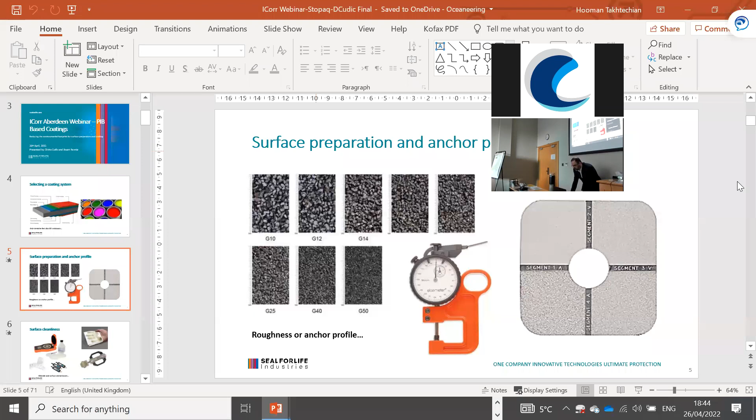Is there any issues with the sound or anything? Anybody, any comments? No, but if there was any problem, people will comment. Sound is perfect.

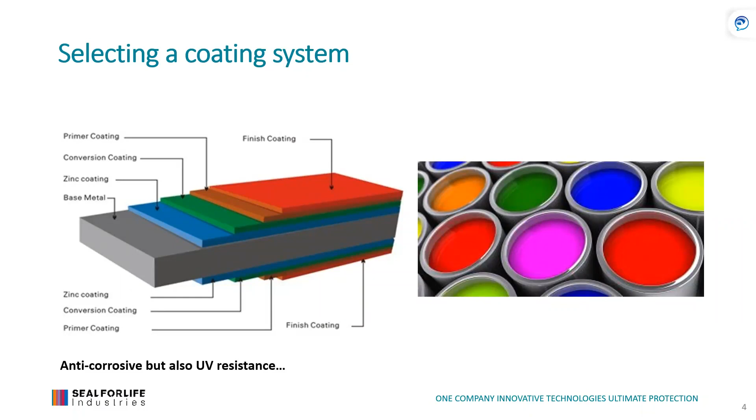But first, some basics, because this is ICorr. How do we protect against corrosion? How do we prevent corrosion? Mainly it starts with selection of the right coating systems that guide us to the surface preparation requirements.

Now, when I started a long time ago, I started as a contractor in rehabilitation of crude oil storage tanks. It was something none of the older engineers wanted to do, so me being the youngest got that job, the dirty one. And 60% of that job was actually to blast and paint the whole tank. That's how I got involved.

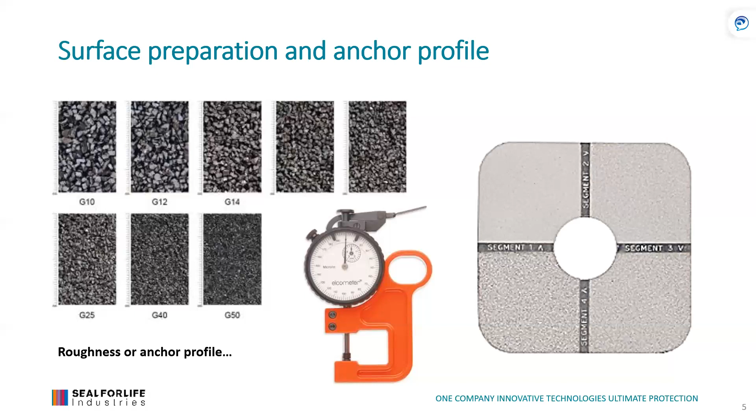And that's when you learn what we're doing: we're creating a roughness for the coating because of mechanical adhesion. Cleanliness comes along the way, but little by little you learn different coatings, different viscosities. How will they flow into the pores of the steel? How will that react over time? Are they drying too quickly, too slowly?

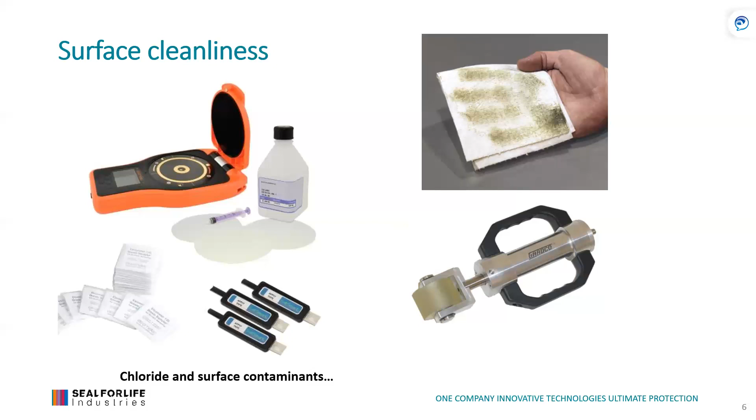Complicated world. Once you do surface preparation, create a profile, of course we need cleanliness - the cleaner, the better. It was always about what kind of air are we using to clean the surface, does it have any contaminants, and so on. But we have various ways of checking that.

Then we get into the coating. What is the dew point? What are the temperatures of the steel? Shouldn't be too low, shouldn't be too high. We don't want accelerated curing of the coatings. And then, of course, we have to look at wind speeds, especially when you do tank rehabilitation.

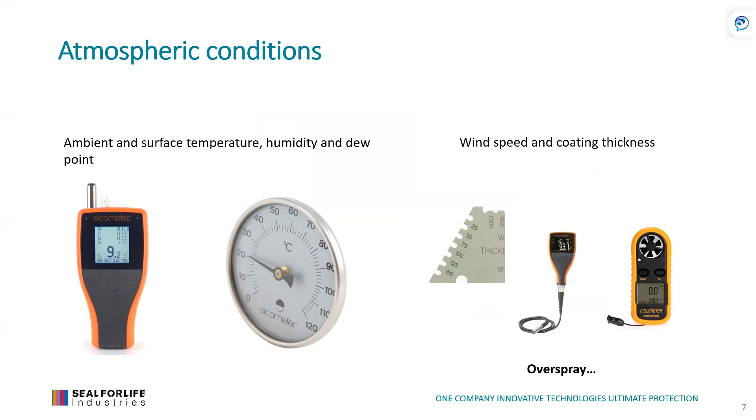There's a lot of overspray and a lot of painted cars that get you into trouble. I learned that one - spent a day at the police.

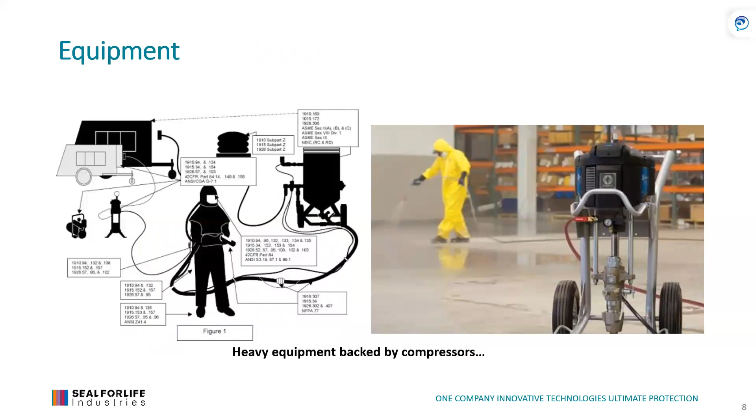Of course, all that application, surface preparation, and application of coatings comes with equipment - sandblasting equipment, painting equipment, powered by compressors, which we'll get to also later, the effects of those. And this is what it looks like - crude oil storage tanks, nice clean surfaces are always easier to do than angular areas, which bounce all over the place.

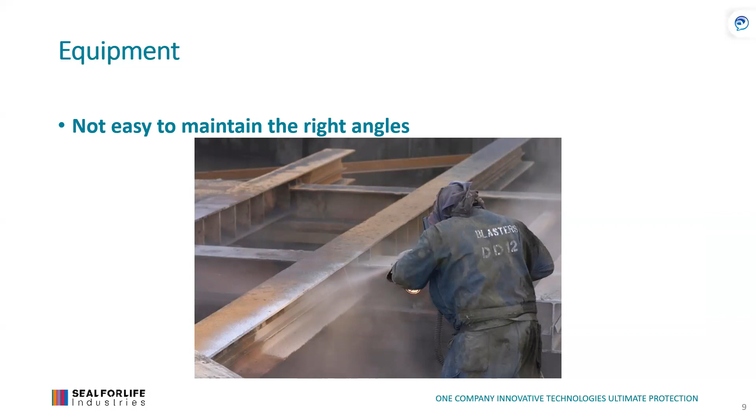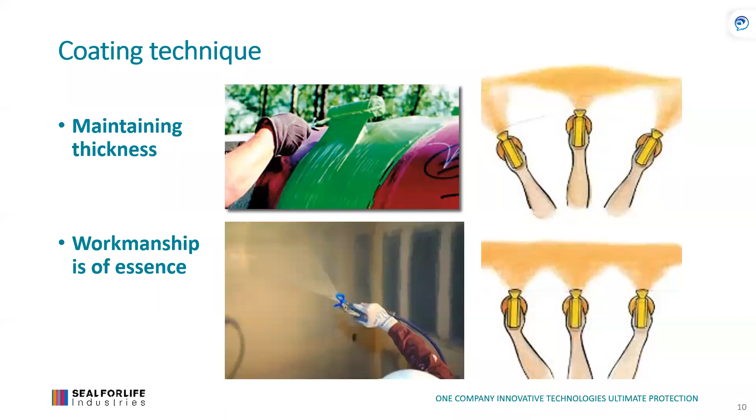And then we're also getting into the part of application. How good a job really depends on the applicator, how well he's going to hold his gun, what is the angle, what is the distance, is the coating going to flow into the pores of the steel, is the coating going to fuse together, or are you going to get that nice film, and at what thickness? It's very important, because if you don't get it right, it will define the lifetime of the coating.

During that period, of course, safety. Nowadays we take care of people a lot more than we used to in the Western world. Unfortunately, 80% of the rest of the world still use T-shirts as filters over their heads during blasting and painting operations. So it's still common to see blasting and painting out in the open.

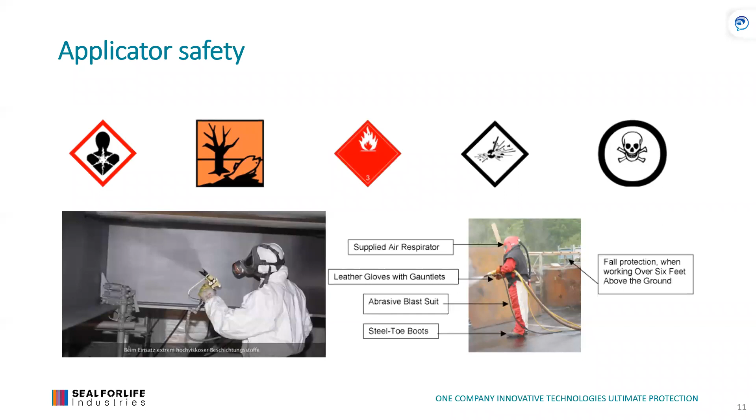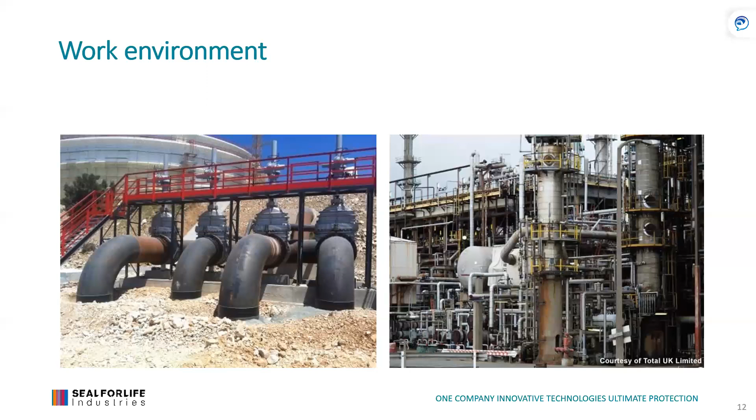And then, of course, it makes a huge difference what kind of work environment you're working in. Are you in an environment where you can actually control where your blast media goes, and paint, etc.? Or are you in a module where you have a lot of sensitive equipment as well, pumps, etc.? Is the grit going to get into the pumps, into the vital areas, and cause sometimes even more damage?

So these are all the things which are part of the process of actually getting a coating onto the surface. And then how do we know, did we do a good job? How do we know how long will it last? Well, in most cases, time will tell. And sometimes it shows up within a few weeks, and hopefully it's not going to show up in the next 15 to 25 years. It purely depends on a lot of circumstances.

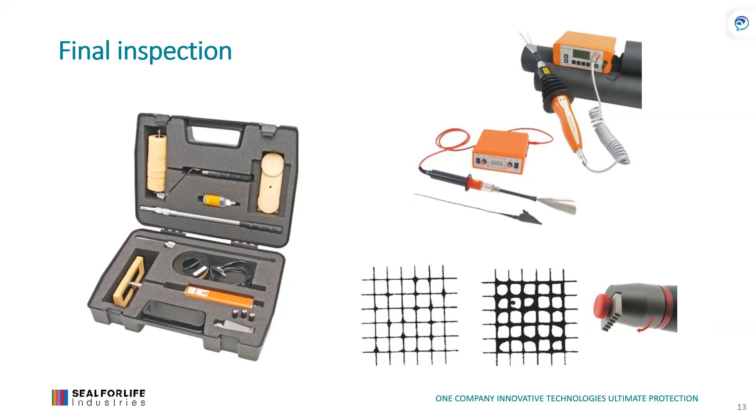But we do some destructive tests, pinhole detectors, to find out how does it work. The effects of blasting - well, not to get into the details of the hazards of safety and so on, but...

nowadays we're more looking at, okay, let's choose my favorite grit of choice, like most people would choose garnet because it's the cleanest. But then you get asked questions nowadays: where's this garnet coming from? Oh, from Australia, and we made a big pit to get the garnet out, and then we transferred it across the ocean, and now you're getting warned about what are the CO2 emissions, what have you done to planet Earth to get that grit across?

And then once you do the blasting and painting, you remove some coatings, sometimes even the good coatings like red lead, etc., that we have to remove. What are we going to do with the waste? And then we brought it from one side of the world so we can dump it somewhere else.

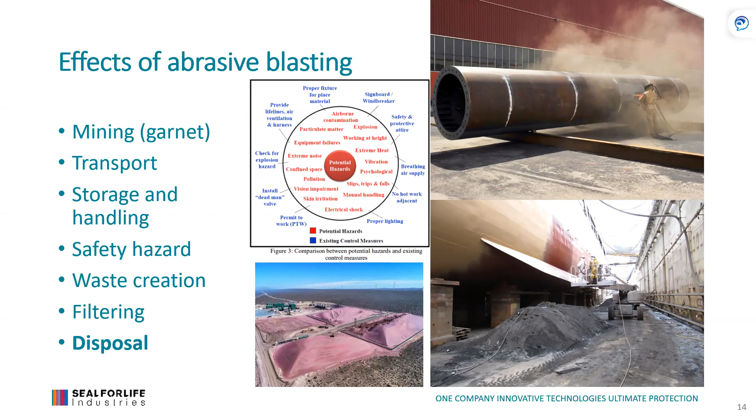A lot of these things are now getting a lot of attention. How do we dispose of it? And what do we create? Especially filtering is becoming a big issue. There's some countries in Europe that will charge you up to 700 euros per ton just to clean or purify the waste grit to get all the previous coatings out, so you can dispose of them separately, especially if they're chromate 6, red lead, etc.

And when it comes to paint, same thing. Of course, we're working on making paints safer for the people, for the environment, the VOC emissions, the heavy metals that we find in the coatings. But then again, the overspray - where is it going? It's going into nature, not necessarily onto the assets that we are trying to protect, the people, the equipment as well, etc. And then what do we do with all these contaminated buckets?

Just to clean an airless spray, you're going to use 20 to 30 liters of solvent just to clean it up. And then what do you do with that solvent? Where do you dump it? I don't even want to say where it goes.

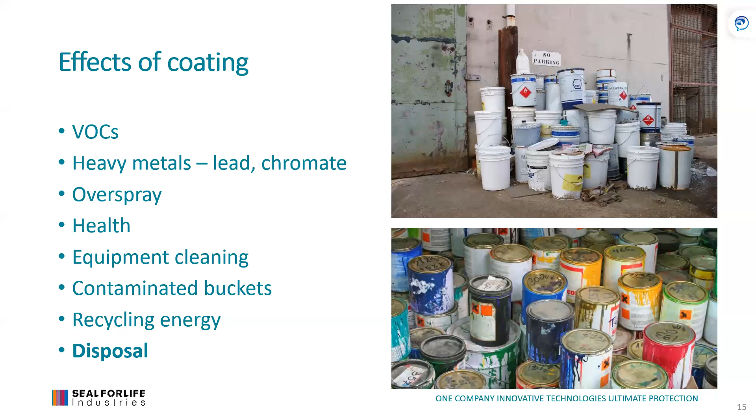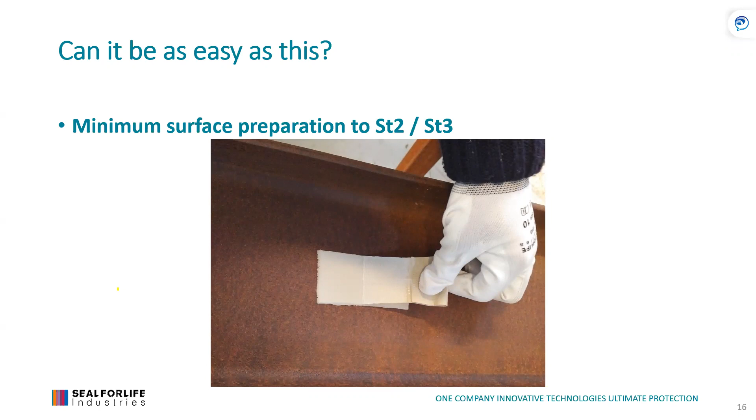Or, if we look at it, if we had a coating that is so surface tolerant it doesn't need roughness, which means it doesn't necessarily need grit blasting, etc. - could it be as easy as remove loose rust, loose paint, have immediate adhesion, and immediately it tells you will it stick or not, and if it sticks, then it'll probably stick over time. But I'll get into more details on that approach of thinking differently, because we do need different kind of results.

Now, we can try and take the existing approach - we tried with diesel engines, tried to make them more emission friendly, but nothing much happened until they decided to go for battery. And then battery actually reduced the noise levels, reduced emissions in the cities, etc.

So sometimes you just have to - we just want paint and coatings to come out of a can, and we need to apply them by brush or by rollers or by spray guns. But we can see even in the car industry nowadays that foils are becoming quite popular, and yet you have foils that are easy to apply, no VOCs coming out of them, and yet UV resistant, mechanical impact resistant, etc. So yeah, it is possible to achieve certain things, but sometimes we have to get out of the bucket, I guess, to put it that way.

So the target of, let's say, creating a new coating - and now I'm talking 90s, late 90s - create a coating that needs minimum surface preparation, which means just change the adhesion mechanism, not to have an interlocking kind of mechanism, but a dispersive kind.

No surface roughness, that's what I mean. Adhering to most surfaces, not only steel, but also coated or healthy coatings that are there. No corrosion under creep, so you don't want water to go underneath it, or corrosion when it's expanding. The rule was times 10: 1 micron is 10 microns, 10, 100, and then it pops the coatings off. No VOCs, harmless to people, to the environment, etc.

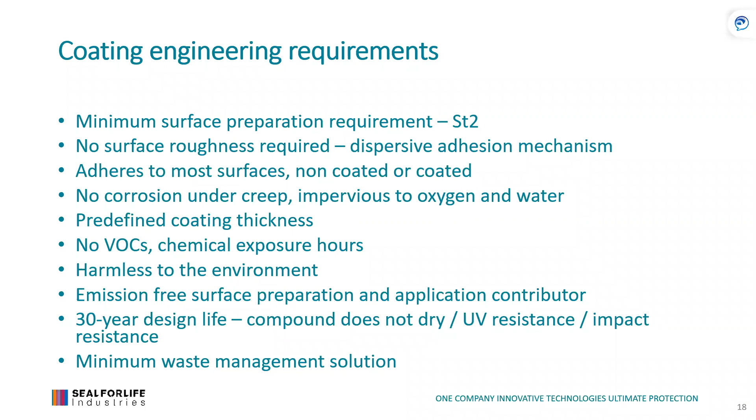And then, to have a lifetime, because it's good for business. I used to be a contractor when you have to do maintenance every 5 to 10 years, same item, blast, paint. But then what are we doing? Creating more waste and polluting the environment in return.

So where can we find inspiration? Chewing gum, we thought, is a good inspiration. You throw it onto the street, no surface preparation, none of that, and you have immediate adhesion, and it will withstand foot traffic, UV resistance, the cold temperatures, the hot temperatures. Most countries even banned it, like Singapore, because it's such a nuisance. So there's something in it.

It works, and at the same time it delivers health, safety, and all the other aspects. It was an edible product. But of course, just by thinking about it differently, you can already achieve something which offers safety for the people, for the environment, and of course an economic aspect, because we know that a piece of chewing gum on the road will outlast the coated part of the road.

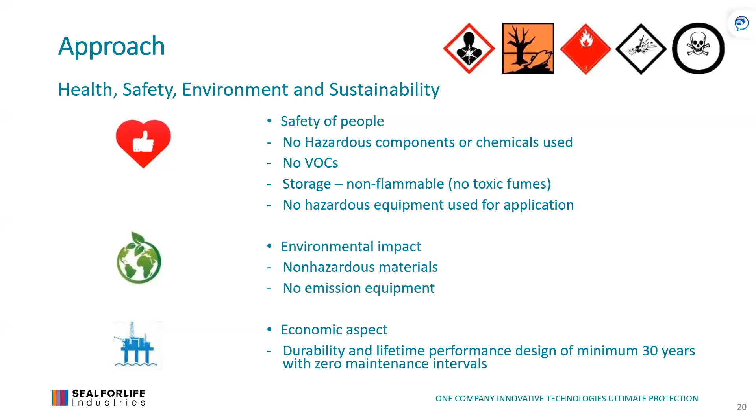So how did we do it? Our approach back then was to select as many polymers as possible that are available in the market, with a track record, primarily what stops corrosion -- eliminate oxygen, and you eliminate oxidation really.

So select a polymer that doesn't allow oxygen and water to go through it, to have immediate adhesion of a dispersive kind, without roughness, etc., something that never cures, because a coating that never cures will always have that adhesion and the flow. The same reason why we don't apply dry paint, we apply wet paint.

But then again, you have also a polymer which is used in the food industry, for example. It's actually used in chewing gum. It's also used as a sealant on double glazed windows that are filled with hexafluorides or even lighter gases like argon, not to escape and oxygen not to go in. So food industry approval, etc. The polymer is there.

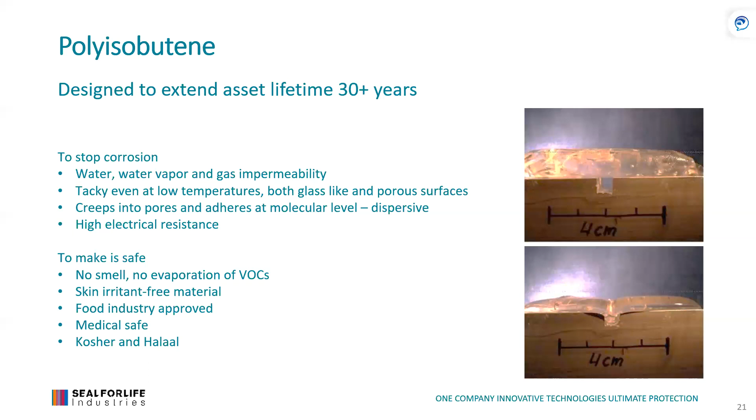Track record -- that's what you need when you develop a new product. You need at least a track record of the polymers that you use. BASF invented the product in the 1930s for other reasons in those times, but at the same time it was proven that the product, because it has been filtered so many times, removal of free radicals, it actually came to a point where you didn't have to do much to it, and you had lifetime out of it.

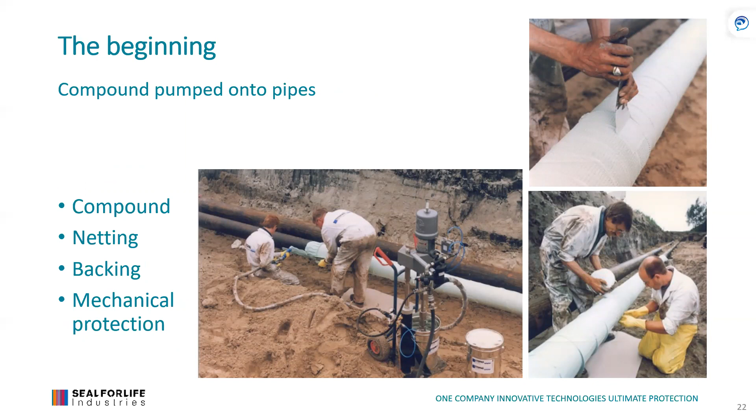So in the beginning, make the product, make the compound, pump it onto the pipe, then put a netting to hold it all together, and put mechanical protection. Labor intensive, you don't have even thickness.

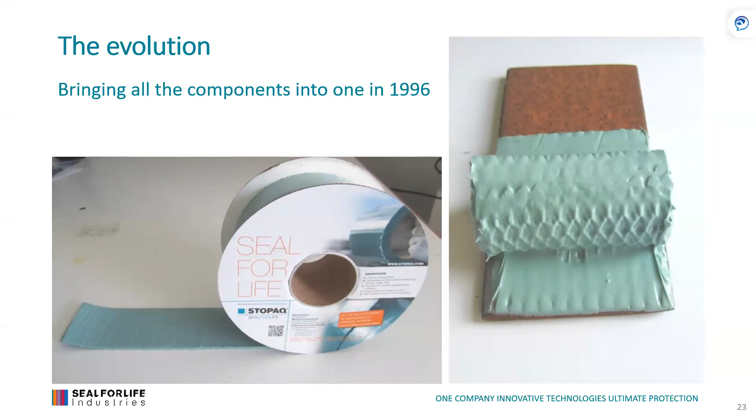So we thought, okay, let's just put it all into one foil, if we can call it that, where we have the compound, we have the netting which holds everything together, and we have a backing. And then we add mechanical protection on top of it. That bringing us to different kinds of systems for pipework, structural steel, and then available pastes and putties for uneven surfaces, etc. I'll show you some examples.

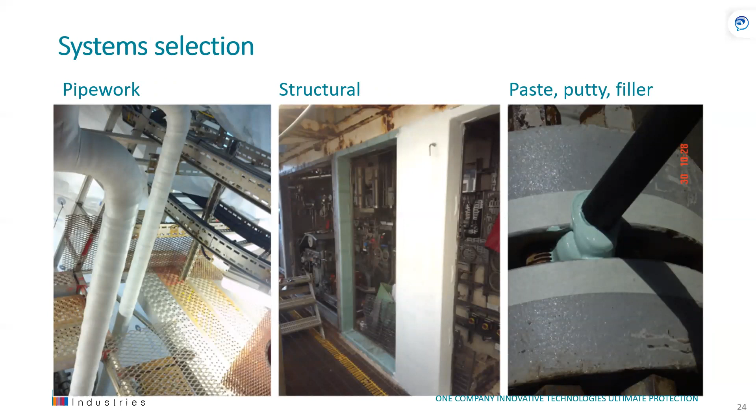And the evolution, of course, from having a solution to start underground -- we started with manhole covers, and then went onto pipes, and then we started developing atmospheric systems, etc., growing out of it.

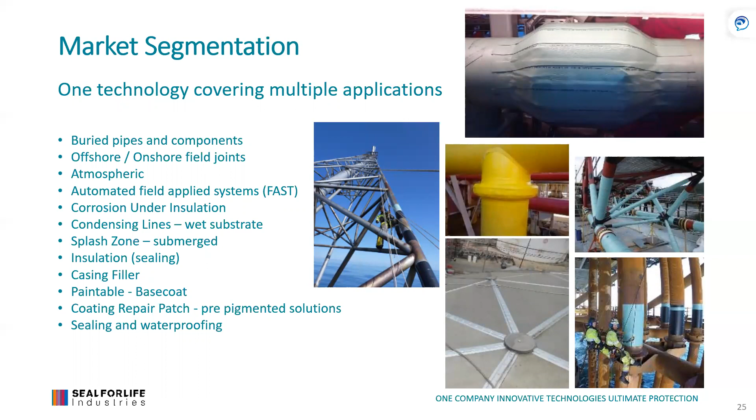Now, what are the differences? Of course, these differences are mainly requirements of standards. Standards are minimum performance criteria according to the environment you're in. So, for example, 21809-3 discusses performances of buried and submerged pipes, soil stresses, how the system works with cathodic protection, etc. If we go atmospheric, of course, cathodic protection is not an issue anymore. We have UV resistance and other parts that we need to conform to.

Corrosion under insulation has its own set of standards. Wet substrate, splash zone, again, another set of standards, because you have to apply it on a wet surface, with a high chloride content in salty areas and salty environments, and yet withstand lifetime, but also impact resistance from whatever floats in the sea, trees, branches, but also boats that impact the piles, etc. Insulation and cladding, which is part of the sealing, so you can actually seal off the cladding for extra lifetime to eliminate the water ever getting into insulation.

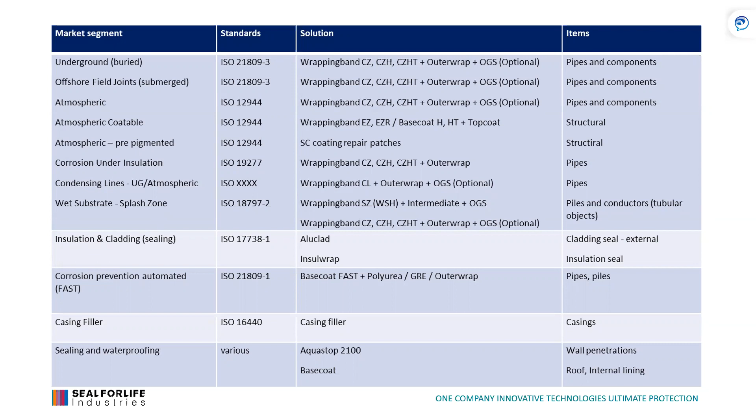Corrosion prevention, which is automated, so you can do longer stretches of pipeline, casing filler, and then of course sealing and waterproofing. Now that one is a tough one. There's no real standards, sometimes it's not even national, it's even regional, and it's also whether it's a public building or home building, that's a difficult one.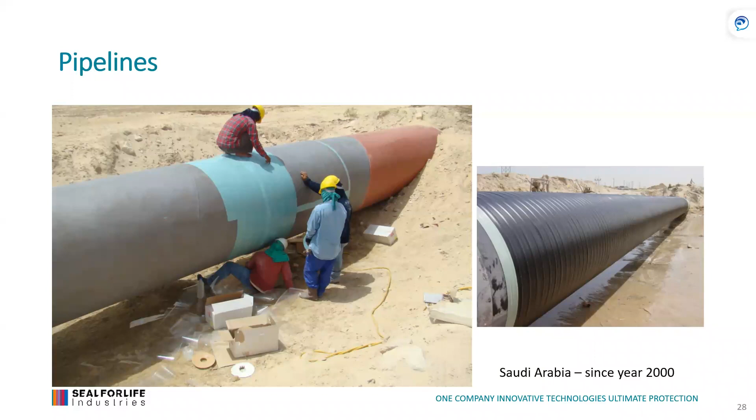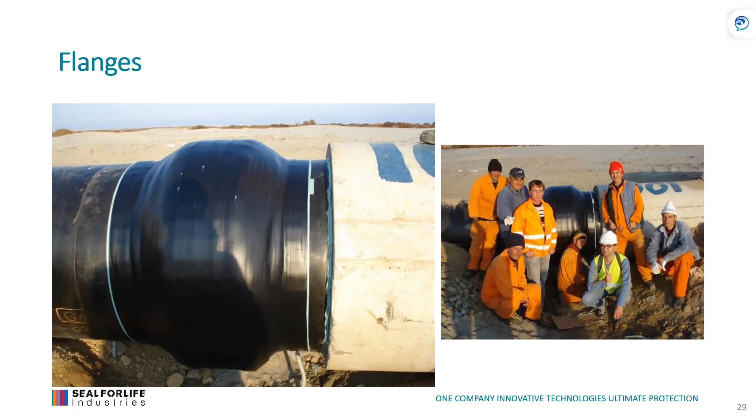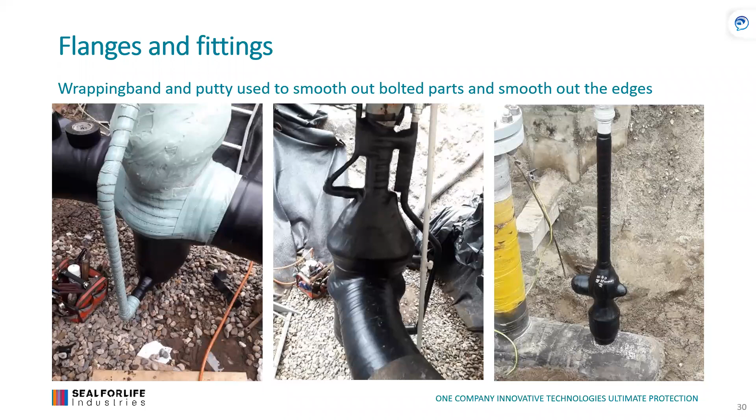And then we did the pipes. What about the flanges? So work with the putties or the paste to do that part. A lot of different flanges and components sticking out of the pipe. That's where you work with the wrapping bands for flatter areas and circumferential areas. But when it becomes a little more difficult, then you can use the putties or the paste to smooth out the edges and encapsulate everything.

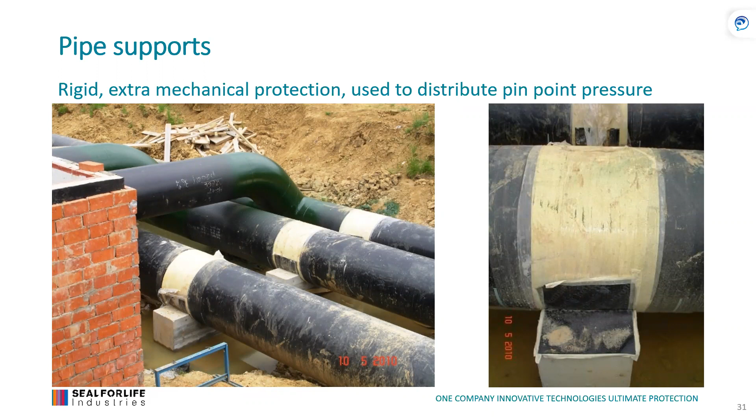Soft product. Yes, it remains soft, but it can be as hard as we need it to be. So we always have this minimum system of this non-curing coating, with mechanical protection that can withstand impact from soil, backfilling, etc., or scaffolding. Somebody chips into the system, which will even get to self-healing. But if we have a large pipe with large weight, then we can add extra mechanical protection or weight distribution, so we don't have pinpoint pressure. It's all a matter of doing systems.

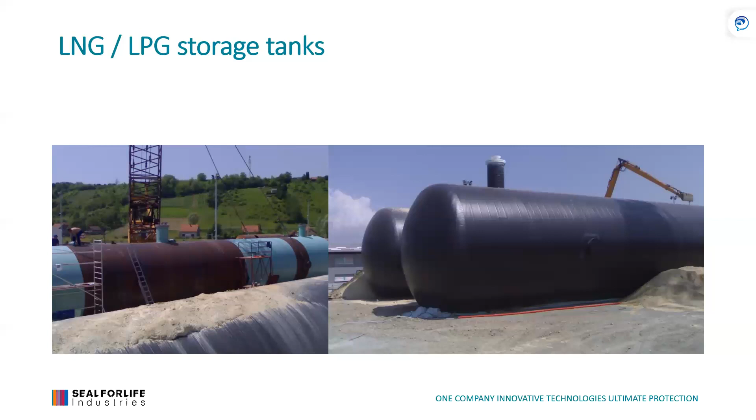Offshore field joints, even LNG or LPG storage tanks, high expansion and contraction, plus temperature changes and fluctuations. And again, if you have a coating that is almost like a skin, whether you gain weight or you lose weight, it's always with you. That's the effect that we're looking for.

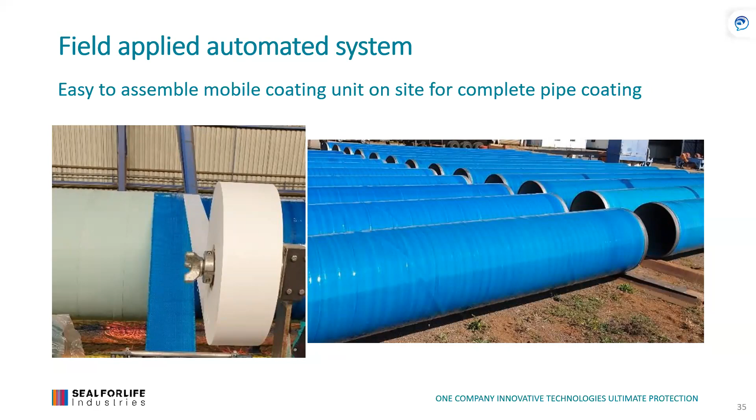And then these are the field applied automated systems for longer stretches of pipes. Doing a lot of these things underground, we thought, well, there's a lot of pipes above the ground. Why don't we start going above the ground? And I think one of the biggest projects we've ever worked on is in Scotland, Mossmorran, the Shell plant, where I think we did about 8 kilometers of pipe work out there, going from underground to above ground. That was about 15, 16 years ago.

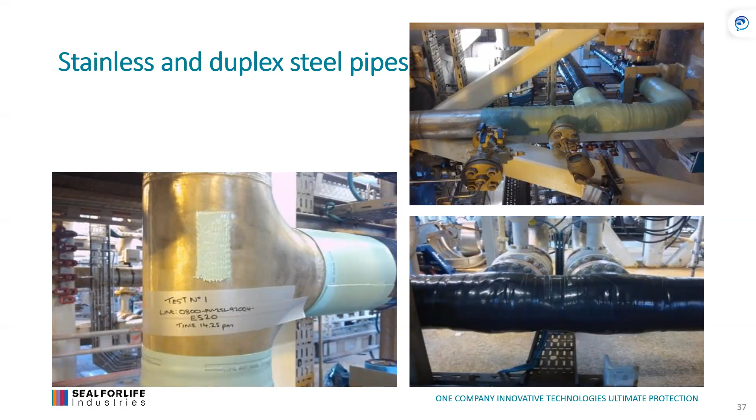But then above the ground, you also get into the stainless steels, you get into different metals as well. Stainless steel has its passivation layer, which you don't really want to remove. You don't want to roughen it up, so you can put a top coat on it. And yet we know about the pitting corrosion of stainless steel pipes. So even without any special surface preparation, you have immediate adhesion to the surface. And like I mentioned earlier, you always take a patch of the product and test whether it sticks or not.

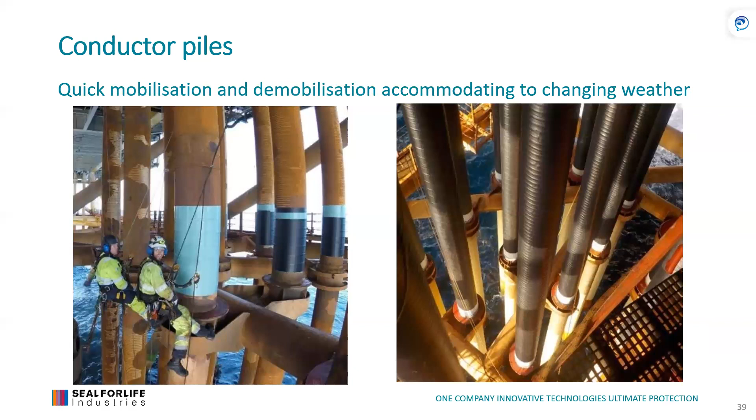So a lot of the jobs can be done just because of ease of application, just by rope access, mobilizing and demobilizing quickly. We're still learning about the product, so what other effects do we bring in? And we get surprised. A lot of these effects we talk about, we didn't design it for all of that. Self-healing happened, we were happy. Sound dampening happened, so we're happy. There's still a lot of things we're finding out 20 years down the line, what else it can do.

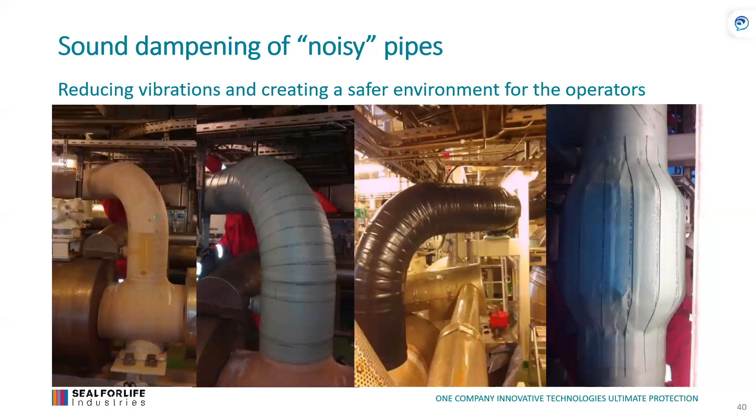And this was just a very noisy area. We wrapped the pipes. Actually, we got this job because the surface temperature of the pipework was 95 degrees Celsius, and they needed a coating that can be applied at that temperature. And then once we covered it, it turned out that it reduced the noise levels in the area.

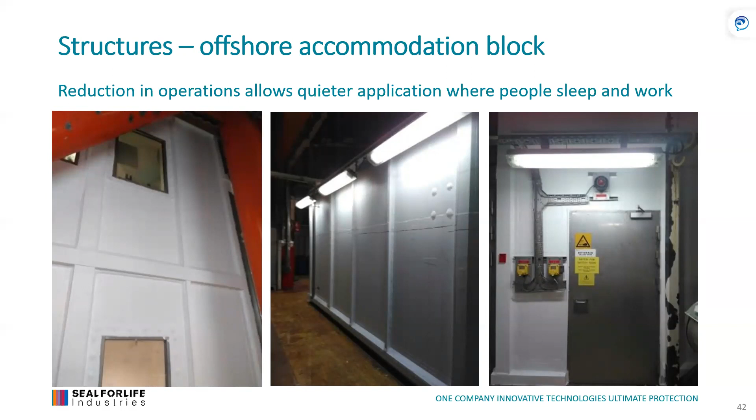And then again, easy surface preparation and application allows you to go to very distant areas. And how large can these areas be? I mentioned the part with structural steel and flat areas. The whole idea was, why can't coatings be applied like wallpaper? So you can have rolls of 300 millimeters wide, prepare the surface, remove loose rust and loose paint, and apply them in sheets one next to another, put a top coat on it, and that's more than enough to do it.

Flanges, all kinds of different parts for corrosion and the insulation of course. The underneath part, we have the standard system of wrapping band plus an outer wrap. Insulation, once the cladding goes on top.

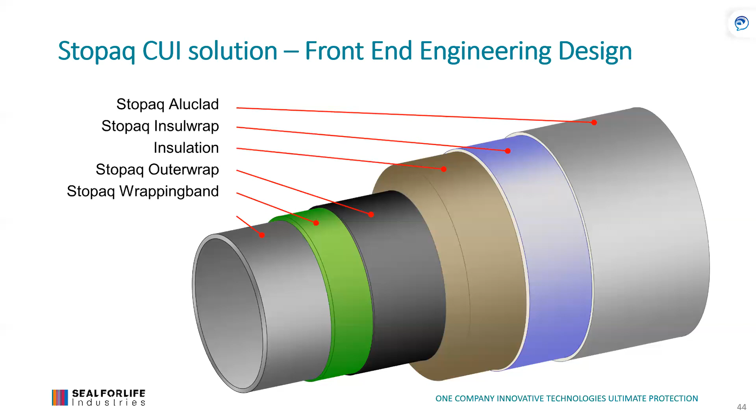On top of insulation, we also have sealing materials like Insulwrap that can, even if something happens to the cladding and the water goes through, keep the insulation sealed off, because once the insulation gets wet, you lose all its insulative properties, including heat tracing.

Here's another example of a high temperature application: a pipe at 120 degrees Celsius, next shutdown is 2 years away, but it's still corroding because of fluctuating temperatures. We don't sell this product for its thermal insulative properties, but it so happened that with the full system, surface temperature dropped by 20 degrees, from 120 to 100 degrees, which for this client meant they didn't need to install personal protection on top of it.

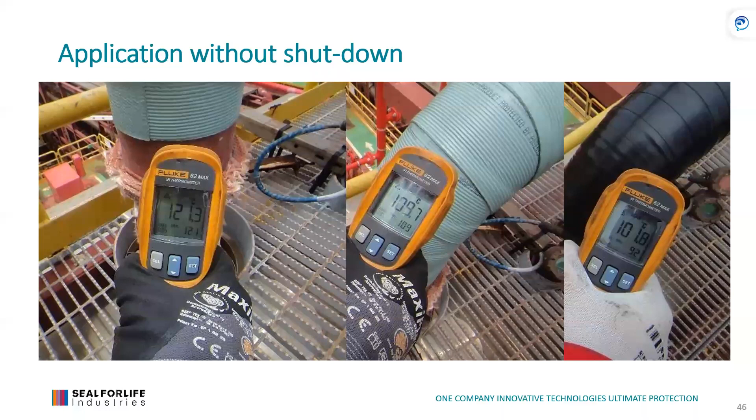And then above the insulation, there's sealing of the cladding, cladded areas, etc. From there you saw these pictures, mostly from the water industry and oil and gas industry, but we wanted to also offer these solutions for bridges, infrastructure, etc.

And then we somehow ended up in the wind industry, because we saw there's a lot of need for coating repair. These are very heavy items that get handled from one place to another, and paint chips. How do you fix it, and how do you fix it when you're hanging off ropes in the middle of the sea? That was a challenge for us, how to develop a solution.

So we have these so-called EasyQote patches, which is a one-coat system. They already come pre-colored, light gray or yellow, for the top or bottom part.

So this is an example: they come on cardboard, and with a Stanley knife you can cut out the size of the patch you need. You wire brush it, patch it, and that's how you do your coating repair.

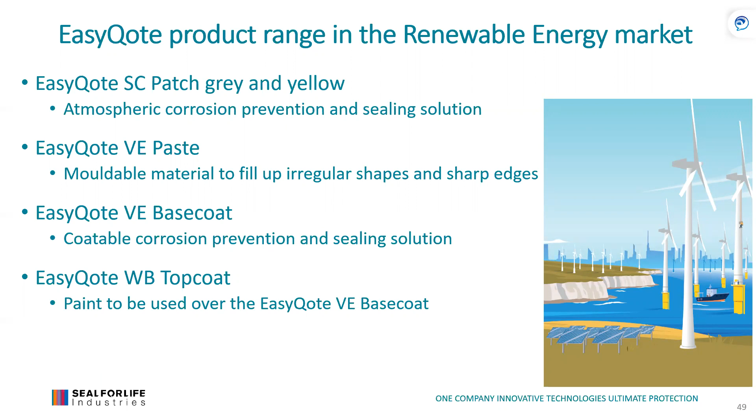And then we have other systems for irregular shapes, again a paste, a combination of different materials. I'll show you, little by little, how you get taken from one area to the other.

You start with monopiles, you end up on the towers. From towers, you end up in the nacelle and so on.

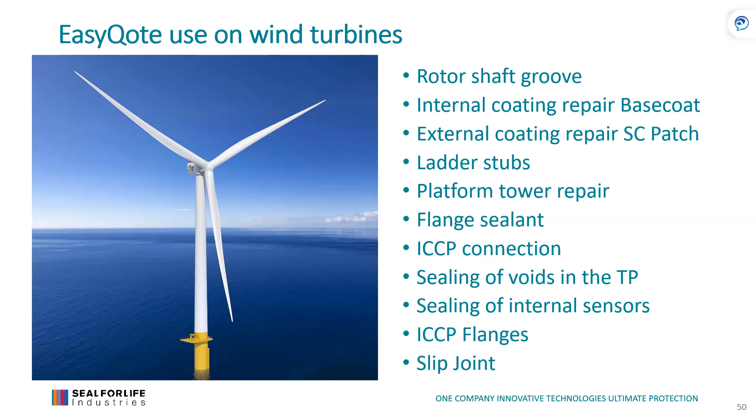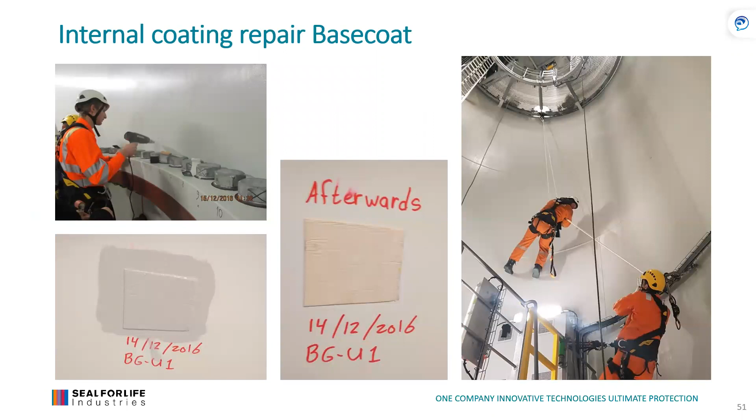This is internal repairs, and you'll find a lot of these damages around the bolted areas, where heavy equipment is used to tension the bolts. Now it's very easy to just patch it to stop further corrosion.

Sealing and encapsulating of sensors throughout the whole towers, including the wiring.

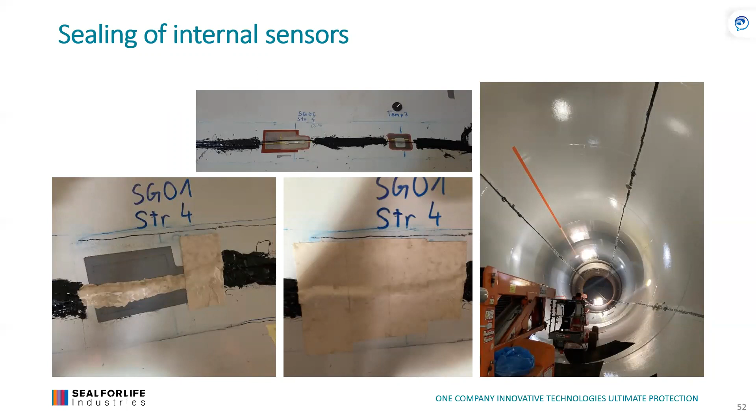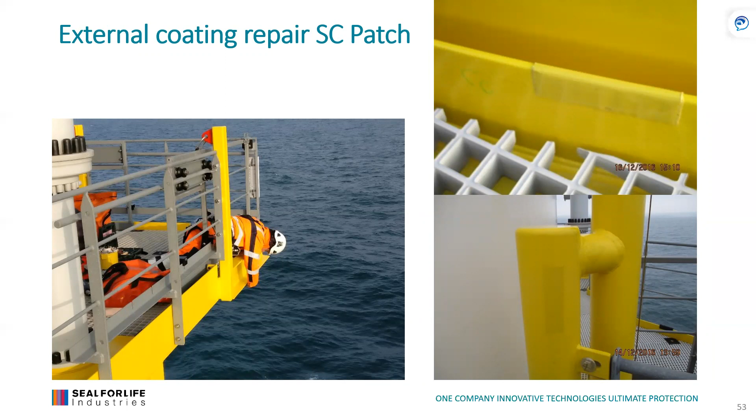These are examples of paint chips. Wherever damage occurs due to handling, you just patch it, really. So not much to do - you don't need to do surface preparation, primer, second coat, third coat, and so on. Just patch it and it's done.

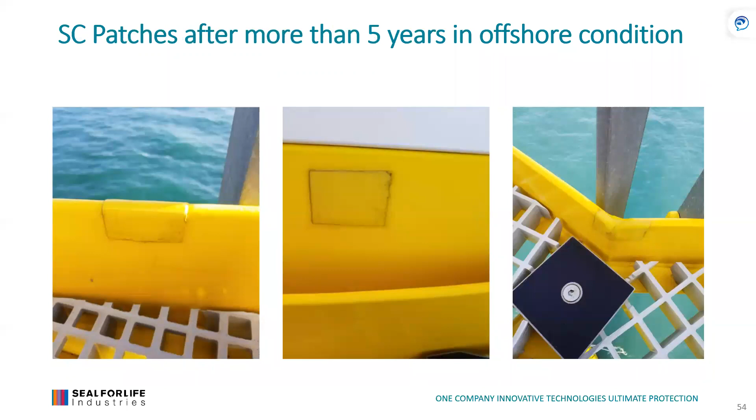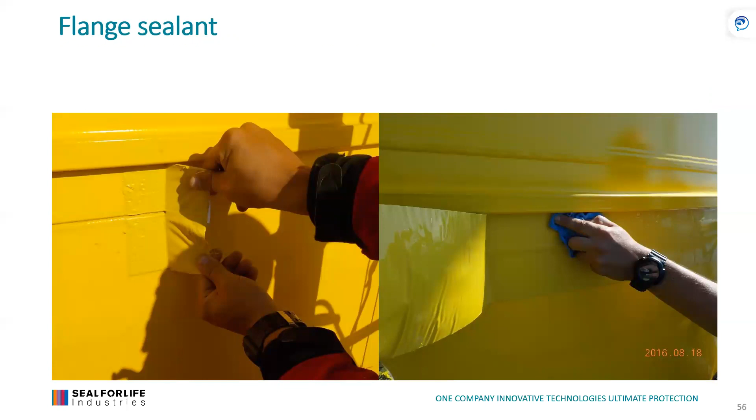Again, part of the TP, so you have a void, and obviously we know that's bound to cause corrosion in that area. So with a combination of paste to seal off the edge, and then the patch just over it in the matching color, it's a two-step system, very easy to do.

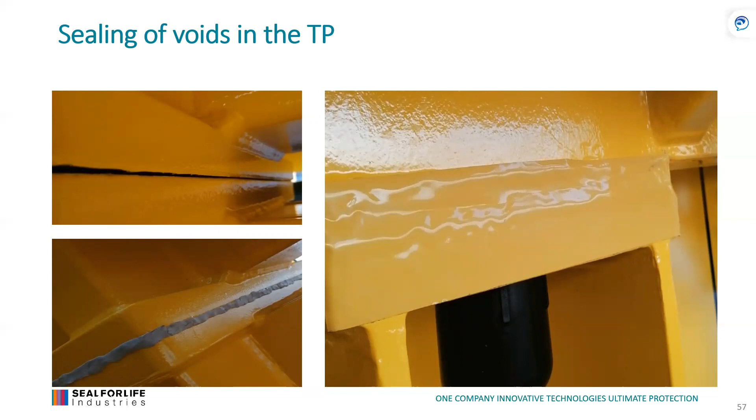And training can be online, and within a few hours you're a perfect applicator. ICCP flanges, so all different components.

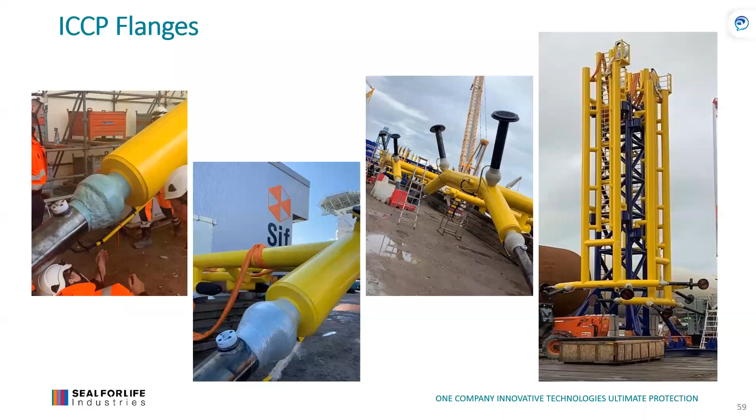This was one of the bigger projects, for this special design of windmills - slip joint windmills - where instead of bolting them together, you put the monopile in and then slip the tower on top of it. To seal those areas from water going underneath and creating corrosion, we create these seals, the green one you can see. Then when you slip the tower on, it smears out the product and seals it off from the environment.

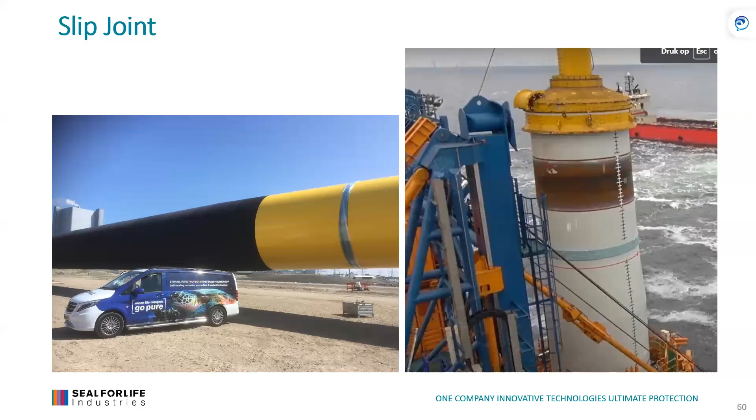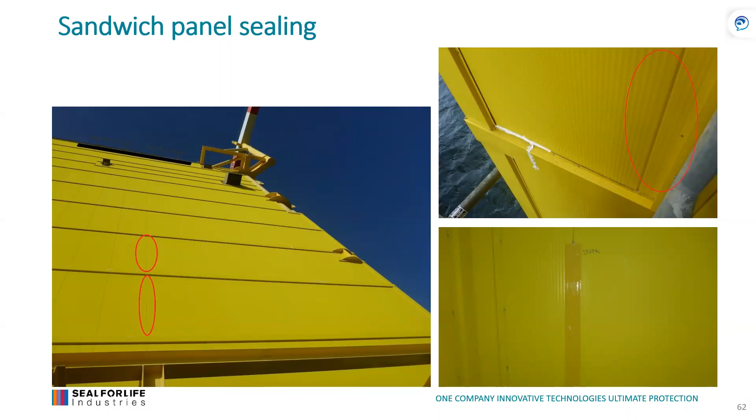One of the latest projects we've been working on was sealing on substations. They're all made of sandwich panels, and of course these locations are always very windy, and that wind, just by hitting these structures, makes the sandwich panels become loose. Soon enough, the rain, the water, the wind, the salty air gets in between the voids. So we've been sealing off those areas as well to prevent further access.

And then, of course, that came from this as well, which is the new design of towers. Well, it's not new, it's a few years old, but now being adapted, and it's very similar to the tower design of the windmills.

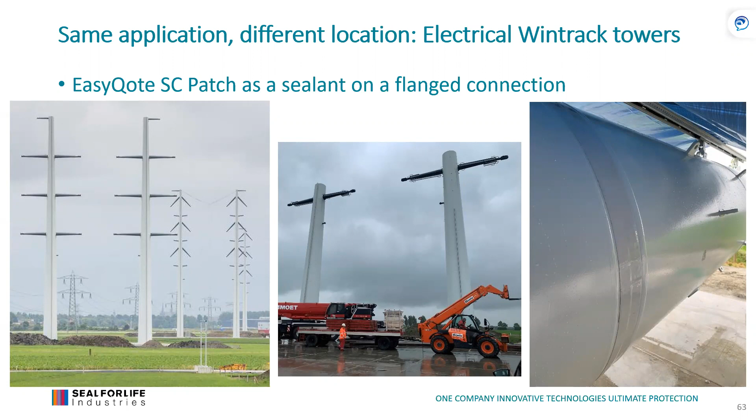So, same kind of design, they are now working on this with internal flanges for high voltage power line transmissions. So that was the easy part of the business.

And now back to what I started in the beginning, which was, okay, corrosion, yes, it stops corrosion, very good. We've been doing it for 20 years, so I think we've proven that the system actually works. But what else do we bring in? That's what we try to focus on.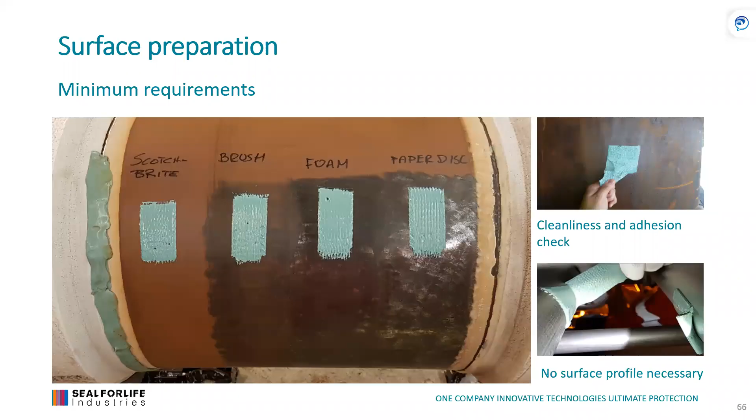This is what a Stopaq looks like. We pack it in roll form, so it looks like a tape. It has nothing to do with tape though, because you pre-cut sheets and put them one next to another, or you can roll them out like wallpaper for straight sections. Mostly you just need a pair of scissors to cut it to shape. What you do is remove the release foil, then you get to the adhesive side, and you just lay it on.

So what is the cost for all this? We always get asked this question, how much for all these effects? Of course, quality doesn't come cheap, that's for sure.

So this is a comparison we've been working on with different contractors, but also end users, of what is the cost of paint. I'll actually, two slides later, show you an absolute price comparison in numbers, in euros, not pounds. But we have to look at the whole big picture, because if we want the paint to work, we select the best paint, and we went through that process. We select the best paint. The success of that coating, 80% depends on surface preparation and application. That's also the risk - if something goes wrong in that 80%, there goes your coating, even if you went for the best one in the world.

And I've seen the best coatings fail, and I've seen mediocre paints work because somebody actually spent time to apply them properly. But in general, we have to look at all this - what is the cost of all these things, but also what is the cost over time? What is the lifetime of this? Is it 5 years, 10 years, 30 years?

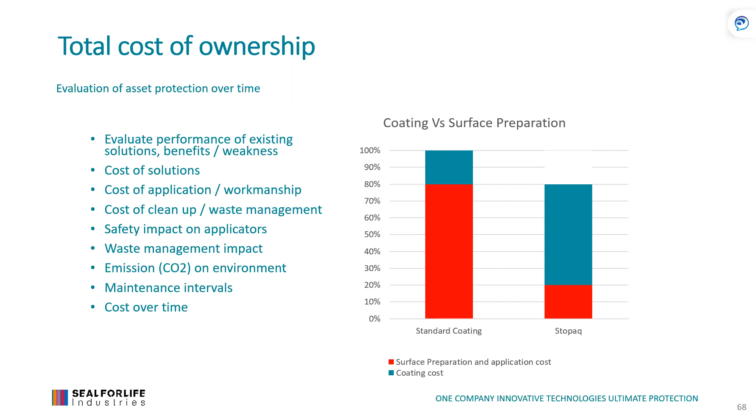It makes a huge difference, especially on the impact onto the environment. This is something we worked on with some of our clients in the North Sea, especially where the rules and regulations of waste management are getting more and more stringent. You can't go to an offshore platform now with 2 tons of grit and come back with 0 tons of grit - you actually have to bring it back and prove that you didn't chuck it into the sea.

So they looked at these comparisons - what do we get with that minimum surface preparation versus the full surface preparation that certain older systems need? This was a comparison of blasting and painting, just in grit. To do 100 square meters, you're going to need about 2 tons of grit, plus all the other stuff that goes with it.

Meanwhile, with Stopaq, no paint cans, nothing around. What you actually have is cardboard, which holds it together, and the release foil, both recyclable, easy to dispose of. And it's just 15 kilos. So there was already the big difference.

But then it was, what about carbon emissions? Because if you don't have to blast, then you don't need compressors or other things. So you can reduce carbon emissions up to 90% in this study.

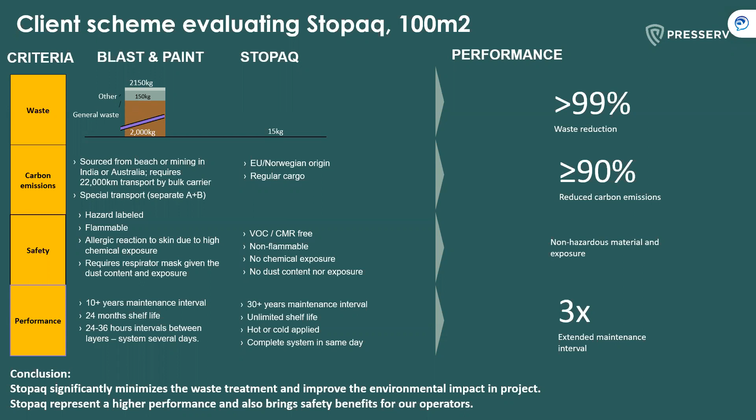If you get 30 years, you gain a lot more out of it, because otherwise you have to do it 3 times. It depends on the location - if you're close to the sea, if it's an offshore platform, or if it's inland, this maintenance interval can be anywhere from 2 to 5 years.

5 to 10 years, depends where you are, but still it's a big cost. When it comes to actual cost, there are a lot of systems that stop corrosion. You can stop corrosion with WD-40, with some grease, but then we get high tech, we get into coatings, zinc phosphates, butyl rubbers - all these systems stop corrosion. The whole difference is what does it take to apply it and how long will it last? That's the key thing. So this was a comparison with North Sea approved systems.

An epoxy system, some of the best, is between 8 and 10 euros per square meter - so primer, second coat, and third coat - versus here with this system. Of course, Stopaq has multiple systems depending where you apply it and what the application is, what resistance you're looking for. This is versus 100 euro per square meter. So 10 times the difference in cost of material.

But what does it take to apply one? What does it take to apply the other? Blasting, no blasting, minimum surface preparation speed, etc. Because, related to that, you can apply it at high temperatures, so you don't need to wait for shutdowns and so on. There's no evaporation or curing process, which means 85% humidity is not so much of an issue. So when you take all these operations into account, on an 8 euro system, you spend 200,000 euros on actually applying it.

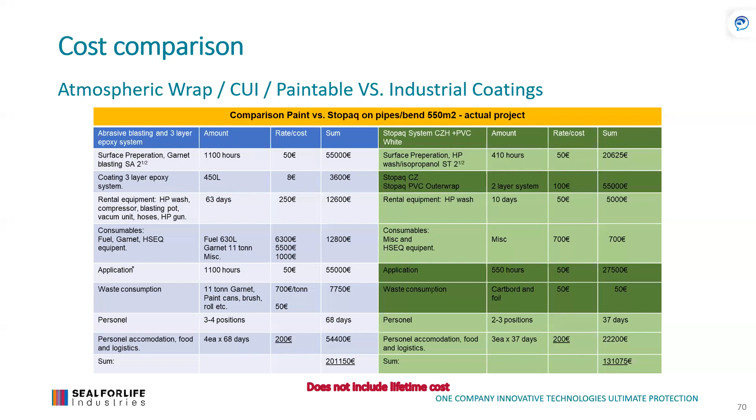So yeah, that's the story of Stopaq roughly. Along the way, of course, what are we doing? We need to show people that there are different ways of stopping corrosion, different approaches. And yes, it's always been done that way.

I've seen, especially when I was a contractor and then working for engineering firms, the copy paste, the speed of just getting the next project - copy paste, change the name of the project, change the name of the client, everything else remains the same because we've done it like that before. So it'll probably be good for the next project and the next project. I've seen it all too many times, but nothing changes. We keep on running in circles.

The pandemic was great, I have to say, in that perspective, because I could see some of the clients actually sit down, not under pressure of new projects, and actually rethink: what are we doing? Are we doing things correctly? A lot of these calculations that you've seen actually came in the last 2-3 years during this period of people rethinking. So there is a positive change.

But we've always done it this way. Yes, even at home, we always used to dump all our rubbish into one spot. Now we're segregating. So there are things that we're going to have to do in the industrial world, just like we do at home. So, to change their perspective of why are we doing things over and over again if it's not good for anybody at the end of the day.